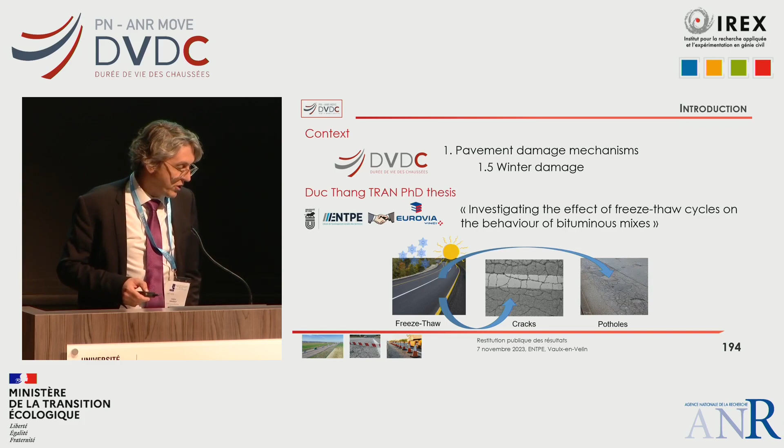Donc rapidement, j'ai ces schémas un petit peu compliqués, mais qui ne le sont pas tant, pour vous présenter les objectifs de la thèse. Donc l'objectif de la thèse, c'était d'étudier, on sait comment se comporte le...

Sorry, what happens to the material? Sorry, my mic was off. So, which proves somebody's listening.

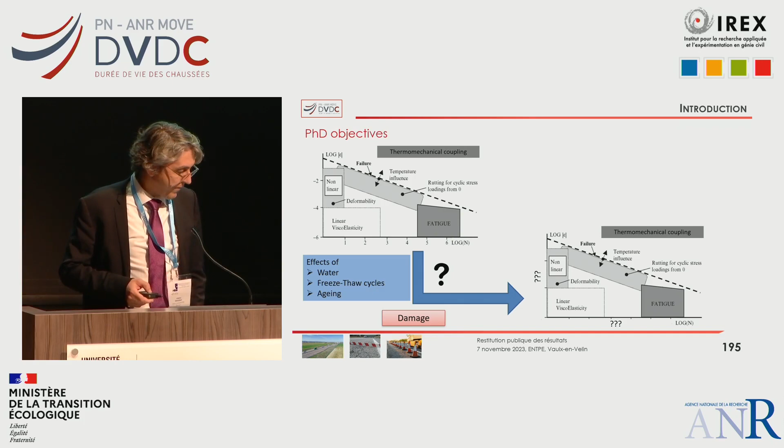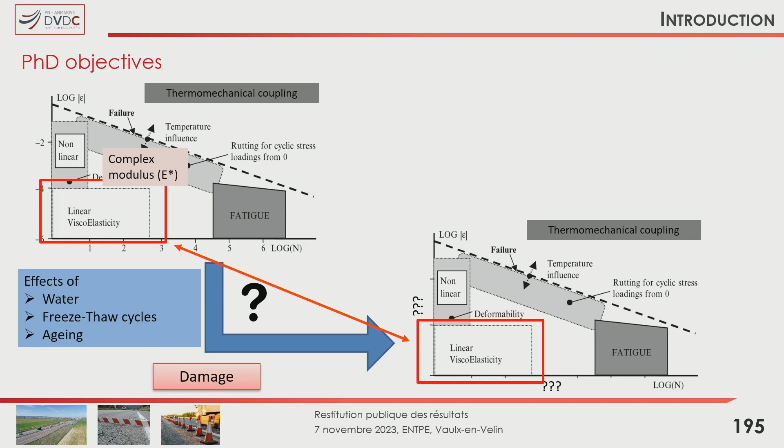Which means that we can see the different materials and their behavior, and the number of cycles, from a few to millions of cycles, and for the vertical aspect, it's the amplitude. How does this evolve? Once we apply the effect of water, the freeze and thaw cycle, we wanted to see what happens with older material. So there are three types of behavior: linear viscoelasticity, where we solicit the material in a very minor way with a limited number of cycles; fatigue, where we won't have too much stress but will do millions of cycles.

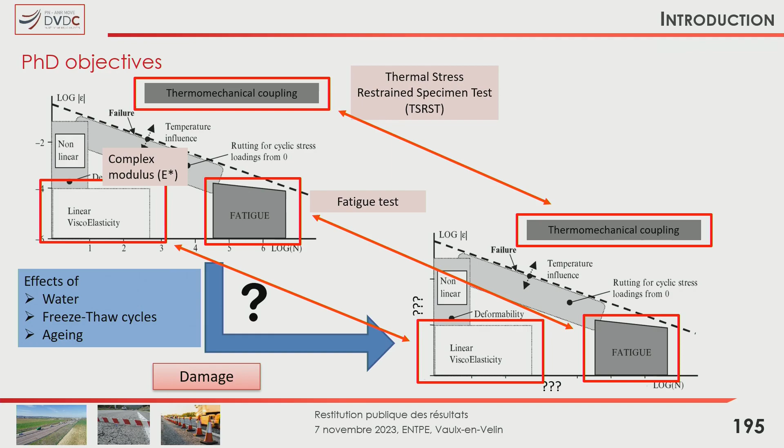And then what really interested us was the coupling between thermomechanics and what we call thermal shrinkage behavior. So we tried to use a BBSG 0/10 class 2 material with a bitumen of 50-70,

and we aimed to have a material that contained 8% of voids. For the making of the test tubes, this was pretty classical. For the lab work, we used material that was either aged or not. We make it, we compact the plaques.

We take about 40 samples, and for the older material, we age it using the RILEM method, which is generally used in other tests. Before compacting the plaques, this was done using a kiln: 135 degrees for 4 hours, then 9 days at 85 degrees.

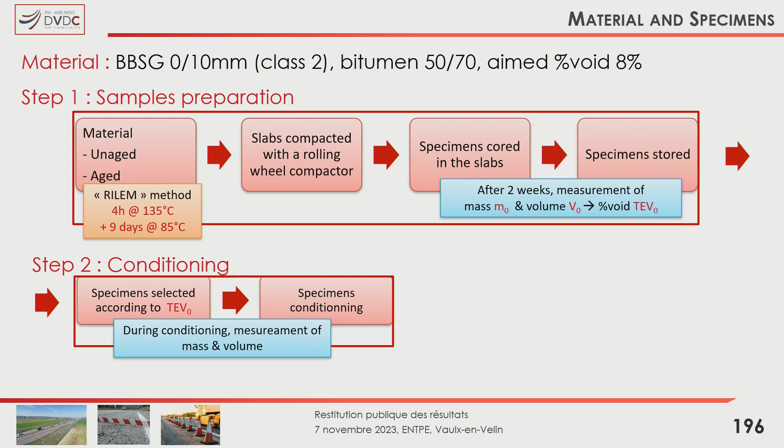Then we made the samples, or slabs, with a rolling wheel compactor. For the conditioning, we took the samples and conditioned them. During that time, we continued monitoring the mass and the volume, and I'll show you why this was important for this study.

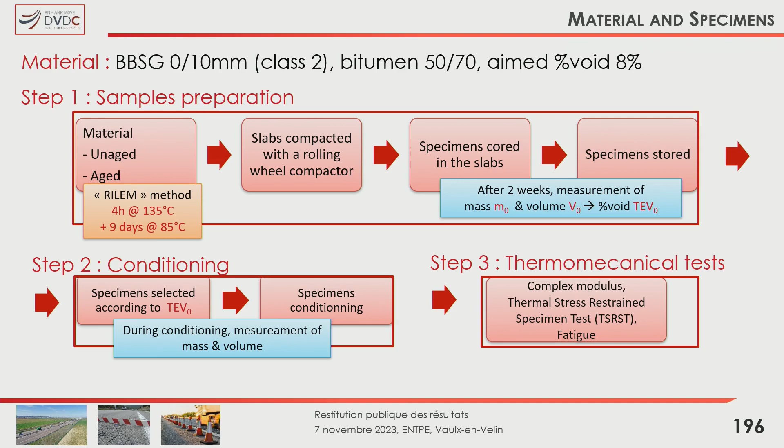Finally, the third phase was the thermomechanical test. In front we had the material that we wanted for the simulation. For conditioning, there were different conditions applied to the samples.

Here are the methods that we used. We saturated the samples when needed, then that was done in a vacuum. It's not obviously what happens on a road, but we wanted to have a maximum amount, and we did it in a vacuum so that we had freeze-thaw cycles, from -10 or -15 up to 10 degrees.

Then we had to make the conditions more difficult, going up to 50 degrees to test the resistance to water at higher temperatures. So we went from -15 to 50 degrees to see the effect of high temperatures, and in some cases we no longer froze the sample, staying between 10 and 50 degrees.

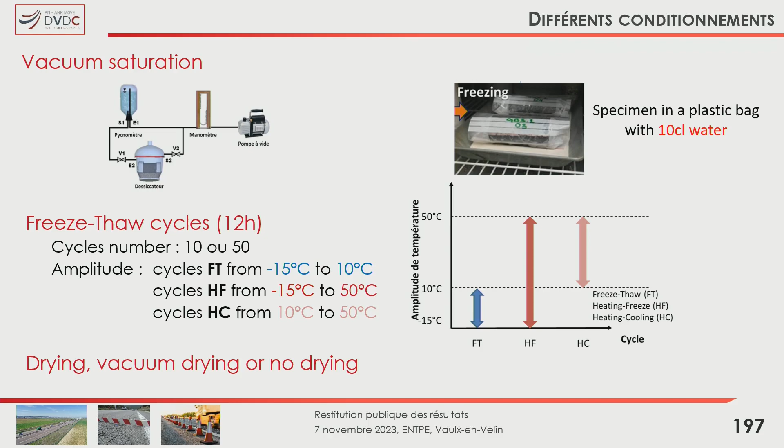We also varied the number of cycles, 10 or 50 freeze-thaw cycles. You can see the sample kept in a low temperature container, with 10 centiliters of water to make sure we didn't have too significant saturation.

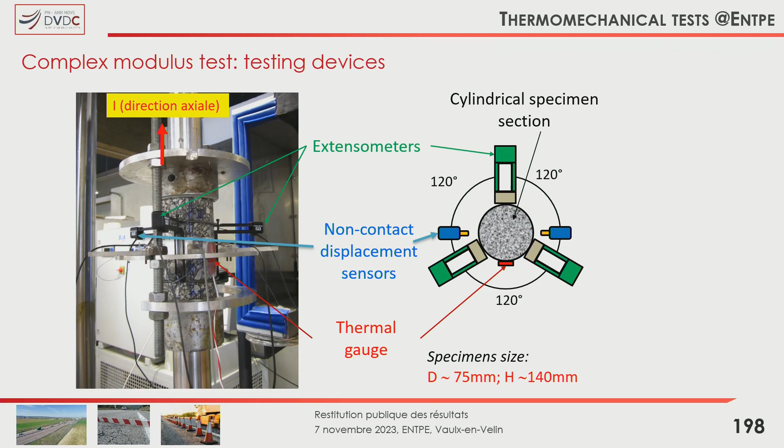For the trials, we used the ENTPE laboratory resources. We ran complex modulus studies on cylindrical samples with sensors, extensometers and non-contact displacement sensors, to have access to the various samples. That's a classical way of doing it, and we'd be very happy if you want to come and visit the lab.

Now, for the complex modulus test, we have different levels of temperatures, and we look at cycles with varying sequences. The idea is to have a relatively low amplitude, 50 microstrain, in terms of deformation.

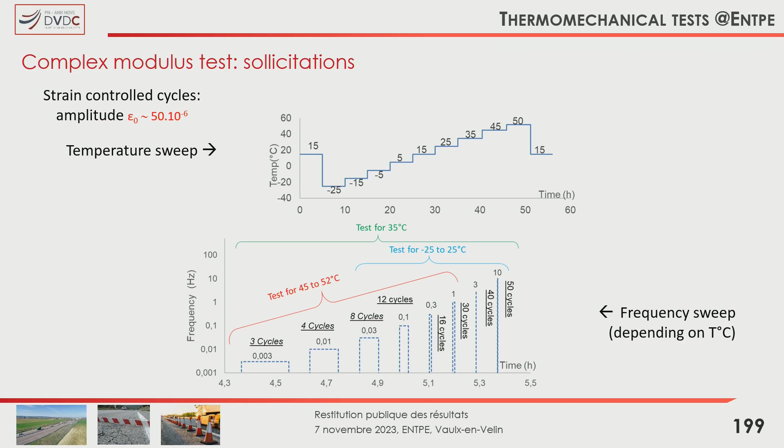I forgot to say, for the fatigue tests, we use the same mechanism, except we'll be at 10 degrees, and we'll solicit the material with deformation levels which are larger but different, to see when we have breakdown and to look at the life cycle of our sample.

Then we used another thermal stress restrained specimen test, TSRST. The specimen is a little smaller, 60 millimeters in diameter, and a little higher, 225 millimeters. It's axial, where we maintain a constant height during the entire test. Then when you cool the sample, it tends to want to contract, and we do not allow it to do so.

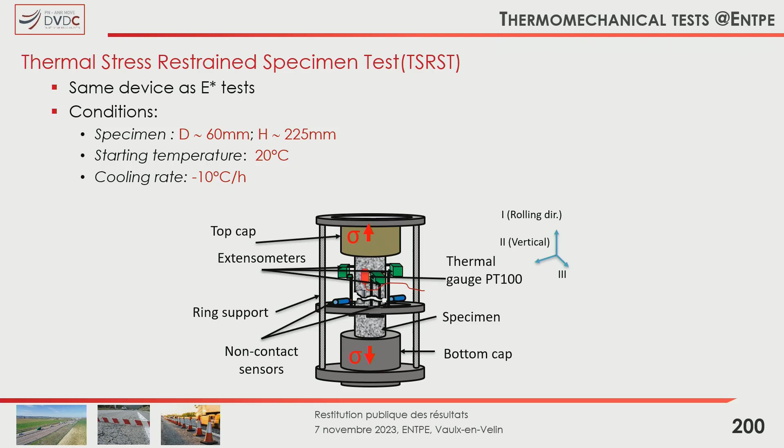So then at one point we have breakdown, and that's the value to evaluate, by comparing the temperature between samples and the cracking at the end.

We separated the experiment into two campaigns. The first was for the study of freeze and thaw, and we had another where we do cycles to reach high temperatures. The idea is to use the sensitivity to water tests, which are generally used, where we heat the sample to very hot temperatures.

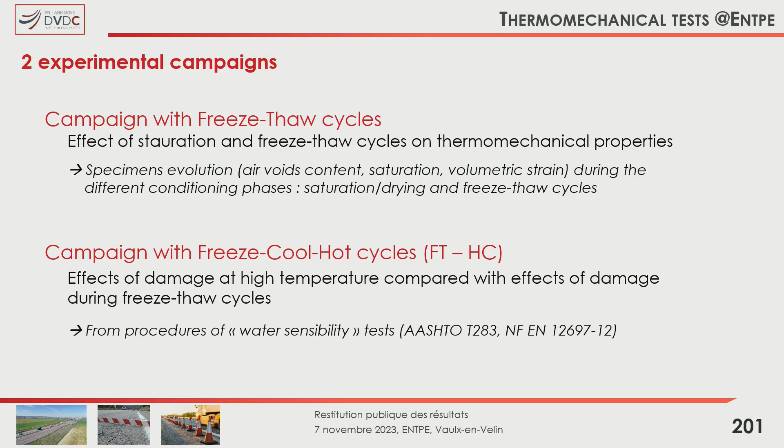Why did we do that? While doing the trials, we saw there wasn't that much difference for freezing and thawing. But when we did the same thing with high temperatures, we had strong effects on the materials. The effect we wanted to show wasn't from freezing and thawing putting pressure, but rather the hot temperature that was more significant.

That was for the experimental campaign. You have the list of the trials and conditions applied for new and aged materials, where we applied cycles of freezing and thaw for dry and saturated materials, the number of cycles varied, and at the end of the freeze and thaw, sometimes we dried it or tested it still humid. So you have the whole campaign.

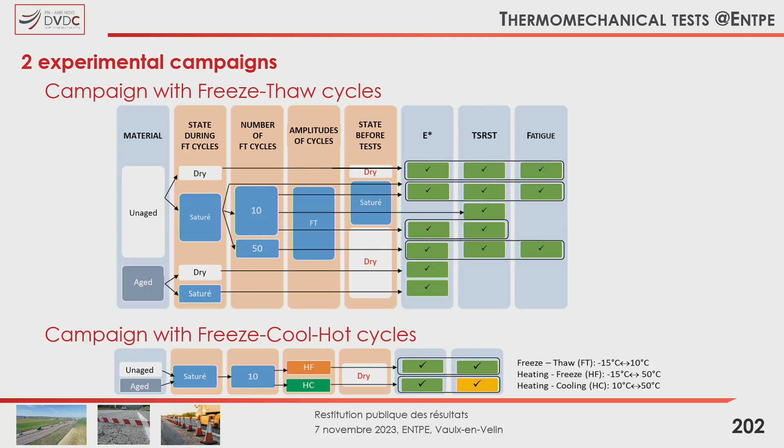Now I would like to present some of the results. It's going to be complicated to present everything, so I just want to give you some insight so that I respect my time frame here.

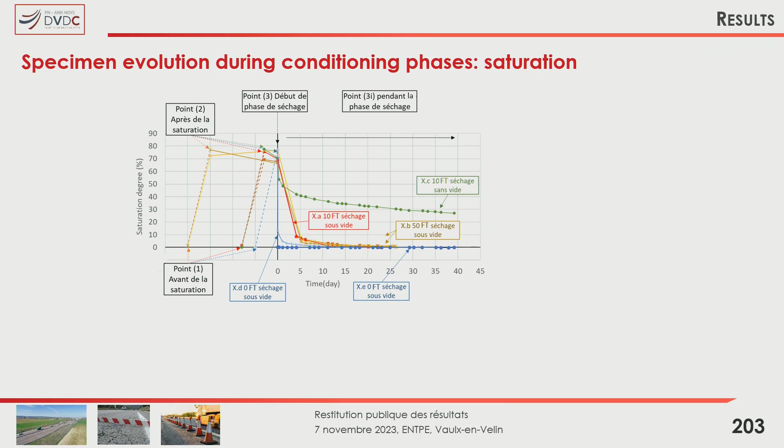On the bottom you have time, and on the vertical axis is the measure of saturation of the sample. On the left, the vertical axis, that's when we saturate the sample, which has a degree of saturation close to 0. By using our method of saturation, we went rather high, reaching levels of 70% at the highest level.

This was maintained, and that's the horizontal part before the vertical. It was maintained even during the period when we froze the sample, keeping saturation at 70%, and then we looked at the drying of the specimens or samples.

If you look at the green line, there's a degree of saturation which goes down quickly but doesn't go to 0. That's if you leave your specimen to dry at ambient temperatures. But if you dry them under vacuum, then the red line, for example, or yellow, you see desaturation which is much quicker, and at the end of 7 days you're below 5% degree of saturation.

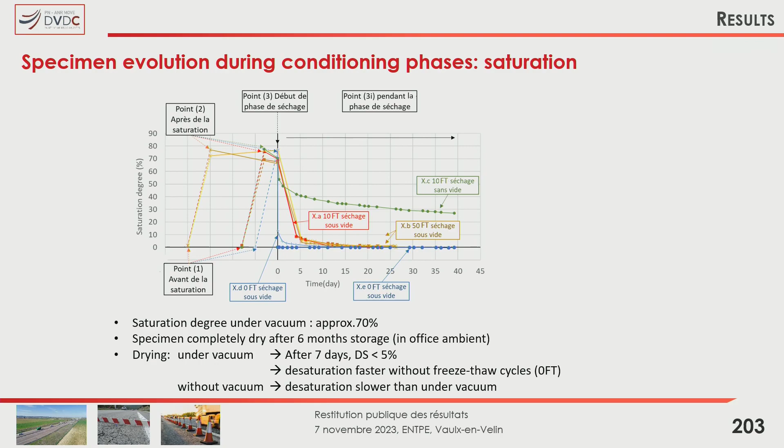That's because we dried these samples. We were able to observe other results as well. After 6 months in an office, the specimens basically also became dry. In addition, we saw that desaturation was a lot faster if we hadn't carried out the freeze-thaw cycle, if they hadn't gone through the freeze-thaw cycle.

So what about the conclusions we could draw? First, let me stress that we were able to achieve quite a high degree of saturation, above 70%. Also, the drying method under vacuum that we adopted was pretty effective. It enabled us to test the specimens pretty quickly, without having to wait for quite some time.

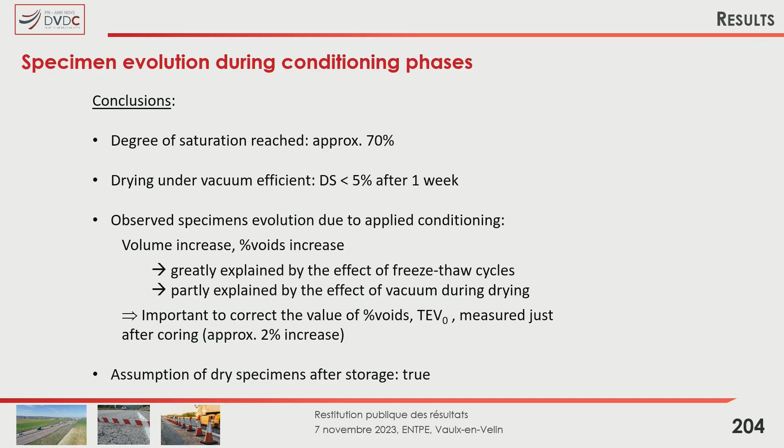However, since we measured the evolution of the test tubes throughout this packaging phase, we were able to highlight that in a vacuum, the products changed due to the freeze-thaw cycle, in quite a considerable manner. For test tubes, for example, samples with about 8% evolved to about 10% following the vacuum, so there was a change of approximately 2%. It's important to take this value into account; you can't just use the initial value obtained prior to packaging or conditioning, because that can impact the behavior of the material.

Let me now refer to the results achieved thanks to the complex module. You're about to see a certain number of curves. I hope you're not going to be frightened, otherwise you won't dare to stay.

Even for caribou eaters, I hope I'm being clear, the caribou eaters at the back of the room. This is a challenge that somebody had given me - I had to pronounce those words.

So, concerning the complex model results, here's a clear illustration with the Cole-Cole plane. This is the complex module, the real part and the imaginary part. The vertical axis corresponds to the imaginary part and the horizontal plane, the real part. If you're more interested in the module, just take the distance between the origin and a point on the curve, and you've got the standard module you're familiar with.

At the top we've got the materials that we test in a standard manner, and at the base the other products that were aged. You can see the blue curve is a bit closer to the horizontal plane, and this is due to the aging process that changed the viscous capacities of the materials.

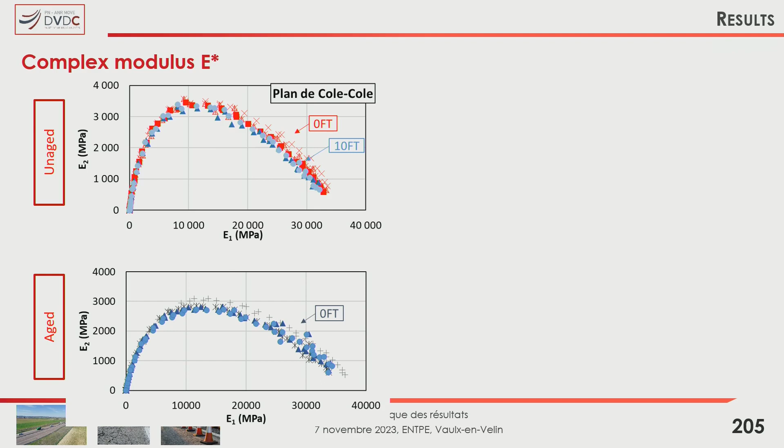The initial results I want to show you involve no freeze-thaw cycles with the test tubes. Then further down the line we had the freeze-thaw cycles. The test tubes were saturated, then frozen and thawed, and then dried before we carried out the tests. This is what happened with the freeze-thaw cycles, with 50 of them in total.

It would seem there were a few changes that were not significant for the non-aged materials. Then when we continued with the cycles, where we took the temperature higher during the cycles - cycles where we had freeze then high temperature, or high temperature then cold temperature but without freezing.

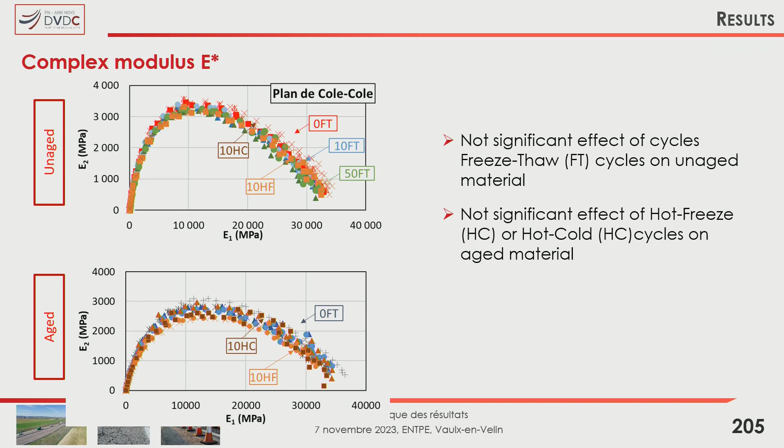Here we obtained curves that, if you look at them closely, look as though they can be overlaid upon one another perfectly. So we might tend to say there's no impact of these cycles on the behavior of the materials. However, this is without taking into account one of the parameters, the void or vacuum parameter.

I've tried to materialize this on the lower graph. Look at the lower graph and the maximum value for the module - you have the vacuum value at the bottom. Whereas if you look at the vacuum level that is very small, it means you increase the module. So if you take into account this parameter, it means we were capable of normalizing the curves.

However, on the materials that had already been aged, the fact that we heated them up again to 50 degrees during the cycles - because we'd aged the material initially - meant we didn't see the same impact. There was no impact of these cycles, particularly for the hot cycle.

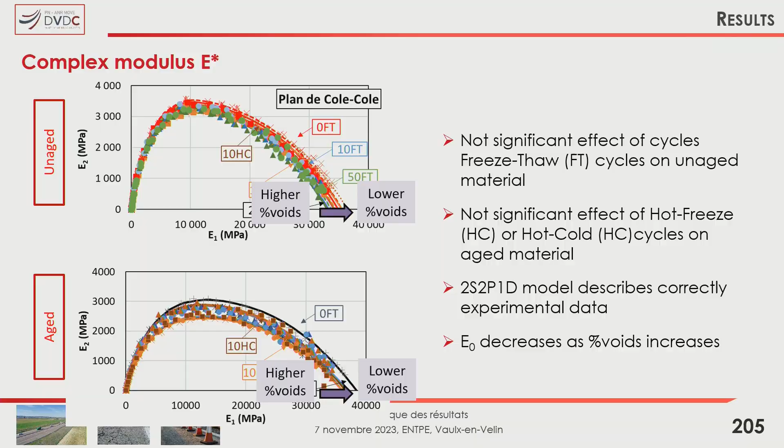Next, concerning the freeze-thaw cycles, we weren't able to illustrate anything, and we saw no significant change to the materials. So all of this was analyzed thanks to the viscoelastic module, and it basically enabled us to obtain all of the experimental results and to analyze and normalize these curves.

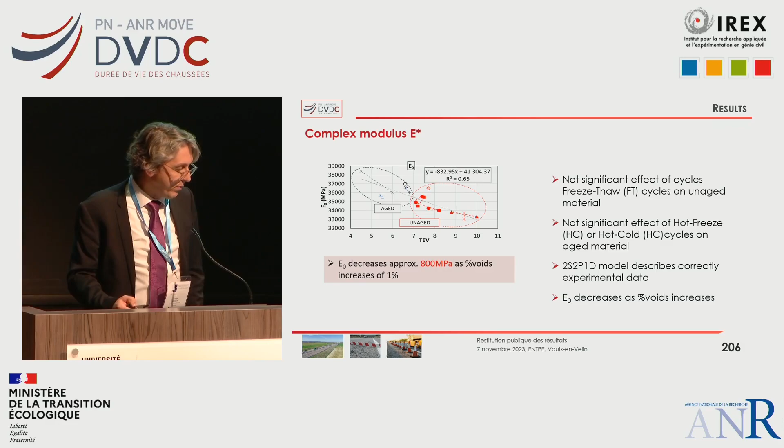Just a few pieces of information on parameter E0. The highest module we can have in terms of materials is at very high frequency and very low temperature. You can see the evolution of this module measured based on the vacuum content, and the vacuum content does have a strong impact on this parameter, so it's important to correct the results taking into account the value in a vacuum and the value no longer in a vacuum.

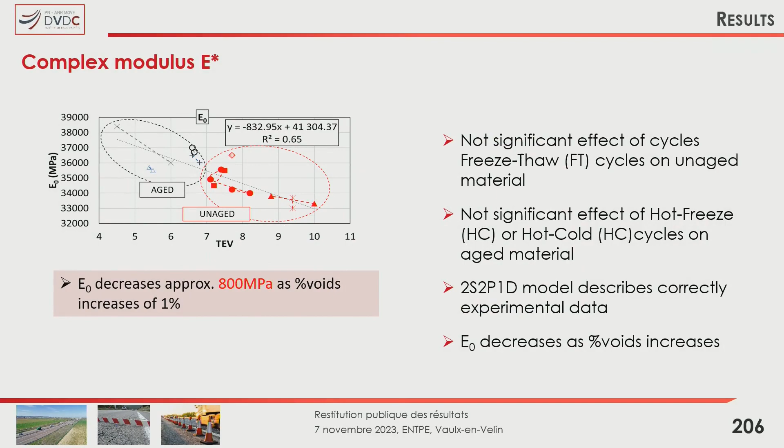And you have an example here where you can see the E0 figure drops for a module that started out at about 40,000. So in percentage terms, it's quite considerable.

Cédric, you have 5 minutes left. Six - please give me six. Okay, no problem.

So the second test was for thermal stress restrained specimens. Now let me see whether I've got a laser pointer. If you look at the curves presented here, you can see the standard evolution during this test, and you can see the stress increases based on the temperature.

This is at the bottom of the graph. In the second left-hand table, you can see the volume-based evolution, and it's all pretty linear - the deformation is quite linear. At the same time, as you carry out the elasticity test, the radial deformation is reduced, and so the diameter of your test sample reduces as well.

And these are tests that we did on samples, test tubes that hadn't been dried and that still contained water. So here there are two different curves that appeared. The first curve is this one here, and you can find it very quickly go back to the standard evolution. And the other curve that appeared was the chaotic evolution here, where you can see that it zigzags up and down.

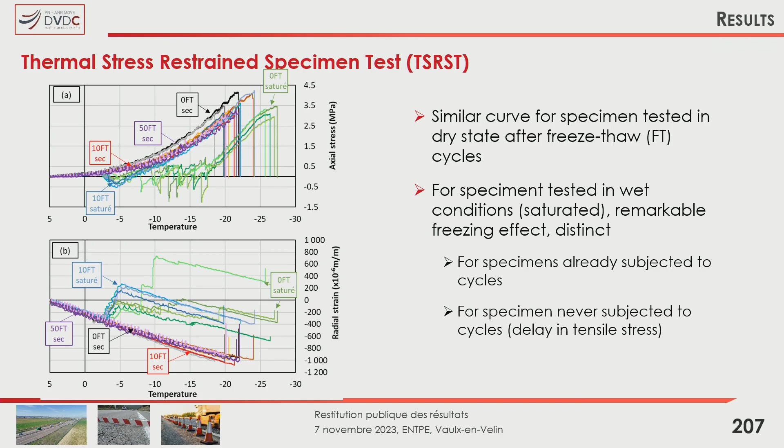What conclusion can we draw from this? Well, this chaotic evolution, let me say, this is an aside. It's the same for the radial deformation. For the different curves that were saturated but that had gone through the thaw and freeze cycle, if you've got water in your materials and you freeze your test tube, the water tends to freeze as well, and so as a result, it dilates in your test tube. And then your test tube, instead of going into traction, it goes into compression, which is pretty logical.

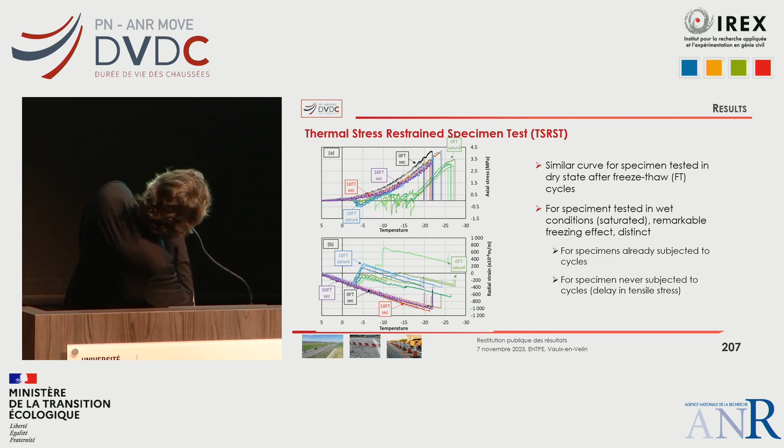Ice has an impact here. And after a certain amount of time, you reduce the temperature, and hence you get the normal behavior pattern once again. What happens afterwards, and that is less normal, it's all of this until it freezes at minus 18. And this test tube, in other words, is saturated, but it hasn't gone through the freeze-thaw cycle. So compared with the test tubes that went through the thaw-freeze cycle, it has a different type of behavior. The first freeze-thaw cycle it sees is the test you're running.

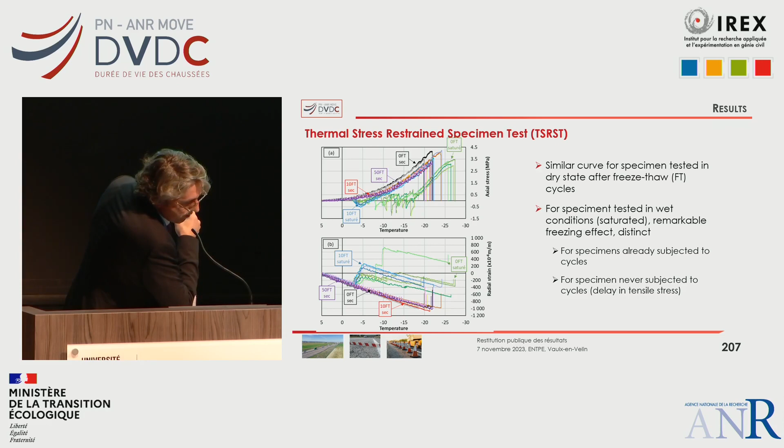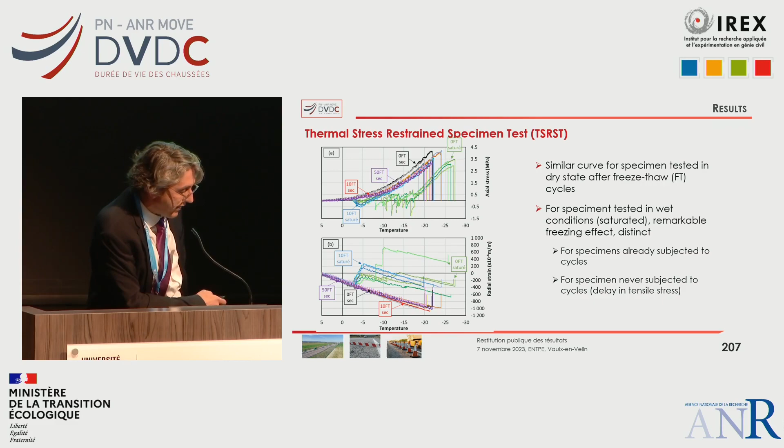And this is where you see that the water freezes gradually in the test tube. And we allocate this to the fact that when you've got water in the pores, depending on the pressure that you can have in these pores, you get a freezing temperature, or rather a water temperature, that drops, and that can drop as far as minus 18 degrees. We've seen this for different types of clays, for example. And this is where you have this phenomenon, and this is why you've got it in this test tube.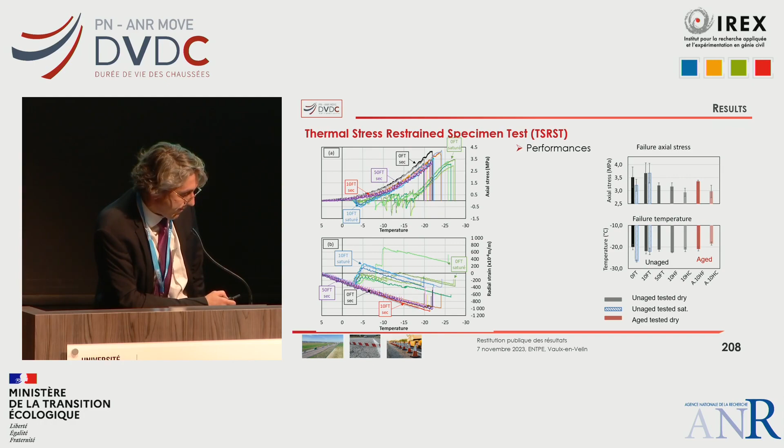So the conclusion we draw in relation to this is as follows. There was no impact. You've got the performances that are given for the materials 0, 10, 50, and then tested with freeze-thaw. The major evolution you see is for the damp materials, and the fact that they haven't gone through the freeze-thaw cycle beforehand means that something happens the very first time the product is frozen in your test tube.

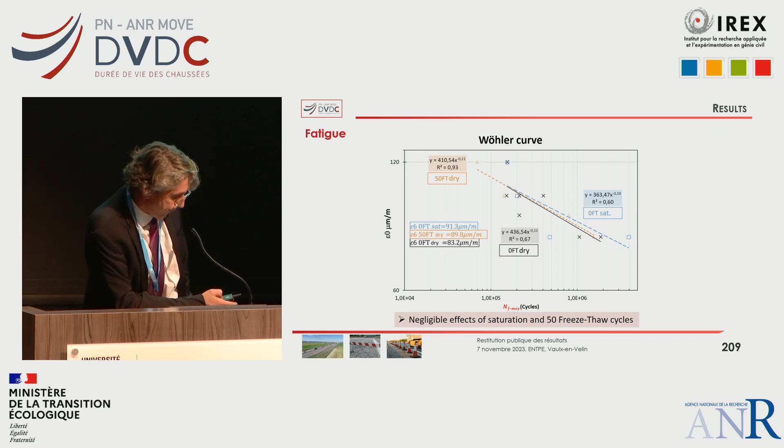So let me move on to the fatigue results. We'll be very brief here. We carried out fatigue tests also. Here you've got the vertical axis for the deformation, and then the horizontal axis is for the number of cycles. And as you can see, there's no real difference for the materials that are tested, whether there have been 0 freeze-thaw cycles or 50 freeze-thaw cycles, and depending on the saturation tests.

This brings me to my conclusions, and it'll be virtually my last slide. I think it will be my last slide. Concerning the complex module, what were we able to measure? Well, once you use your test tube when it's dry, that's what we were interested in. You won't be able to highlight an impact from the freeze-thaw cycle. We had up to 50 cycles, and we saw no impact on the viscoelastic properties.

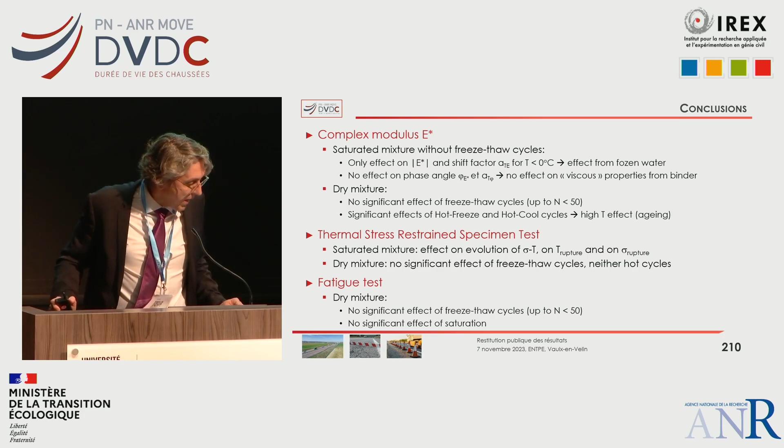Here you can see the fact that you've had a first freeze thaw cycle, it completely changes the behavior of your test tube. And what we imagine is that it must have dilated the pores where the water was located, whereas the fact that you've got water in the material and the fact that you haven't dilated the pores, then the water isn't free to freeze as it wishes, and it has to reach much lower temperatures before the test sample is able to freeze completely.

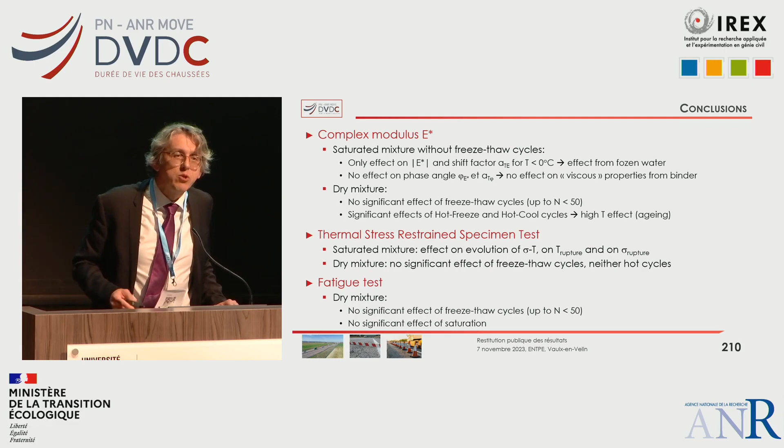Next, for the fatigue tests, along the same lines, we didn't really see any significant impact of the freeze-thaw process or saturation, whether the sample was dry, damp or saturated.

That's what I wanted to say about the few results. Of course, within the scope of the project, a certain number of reports have been drafted. So I do invite you, if necessary, if you require any extra information or if you've got any questions, please do read these articles or read the PhD thesis report. And we also took part in the optimization of these results, having them published, etc. My 6 minutes are up.